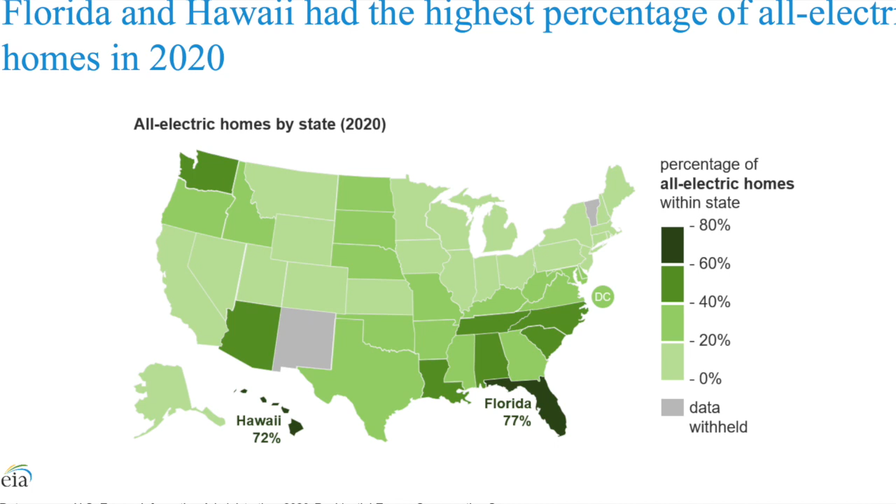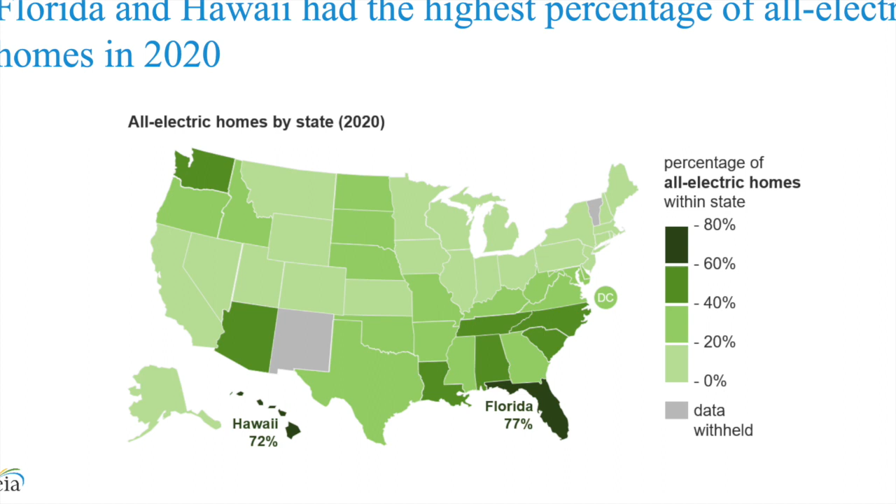One of the first trends we were discussing going into this conversation was grid interactive efficient buildings, or GEBs. Is that what we're seeing when we're looking at this graph? When you say all electric homes, are those the type of homes that are GEB?

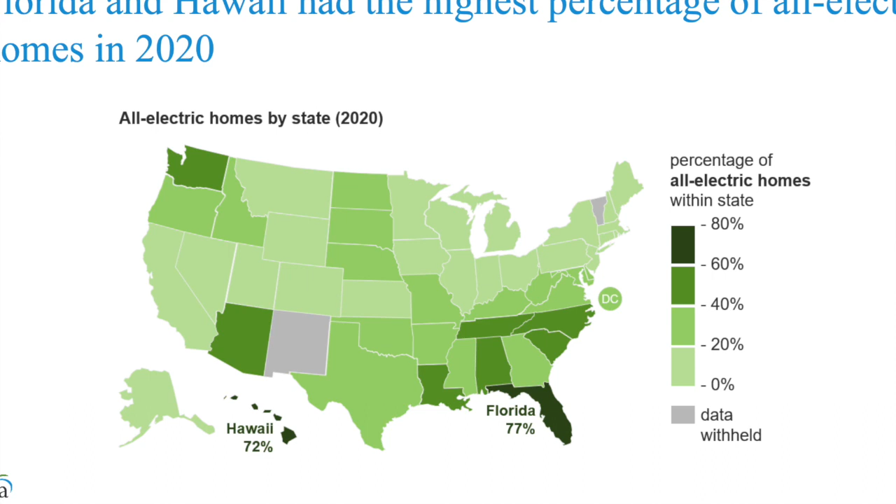Yeah, so GEBs are kind of going to go a step beyond this, but it is part of the same discussion. So yes, our first trend with grid interactive buildings is the next step. I think it's the next wave for electrification and how we look at our power grid.

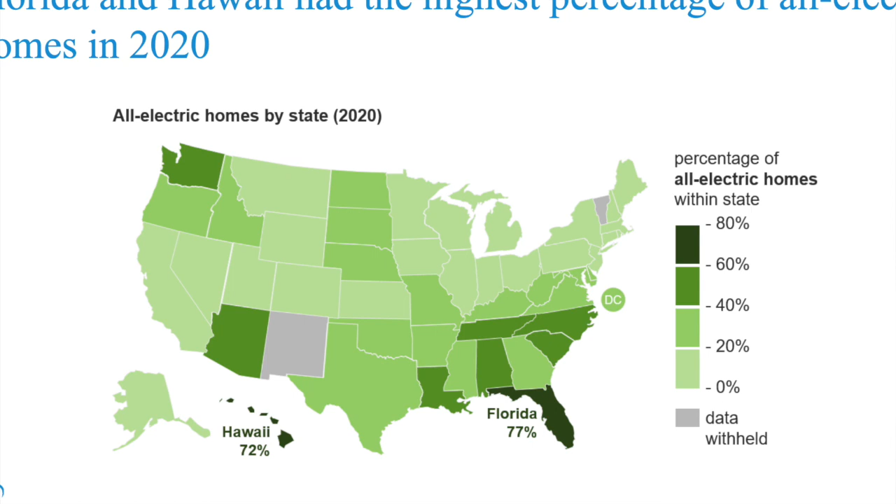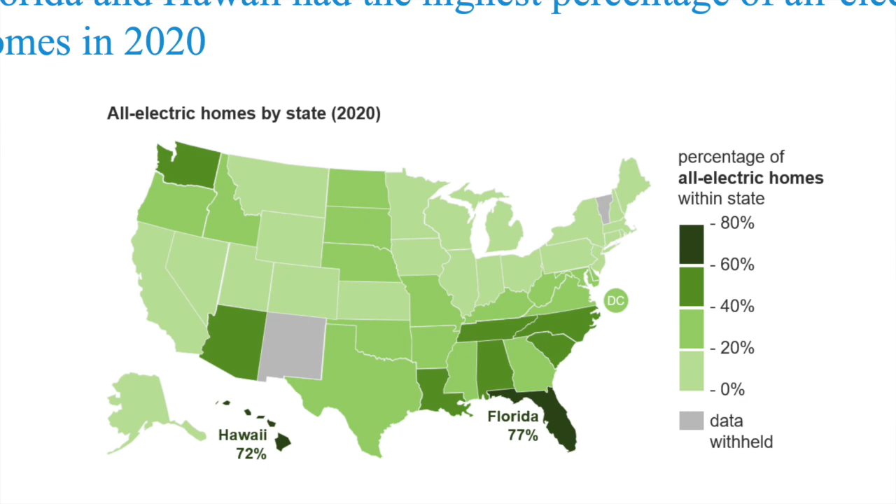So when we talk about grid interactive buildings, we're talking about building equipment and systems that work with the power grid. In other words, when you have a lot of clean power available on the grid, or low demand, or when the grid is really clean, there aren't a ton of dirty emissions being put out there because of the power grid. The idea of grid interactive buildings is that buildings work with the power grid, and draw power when it's more environmentally friendly to do so.

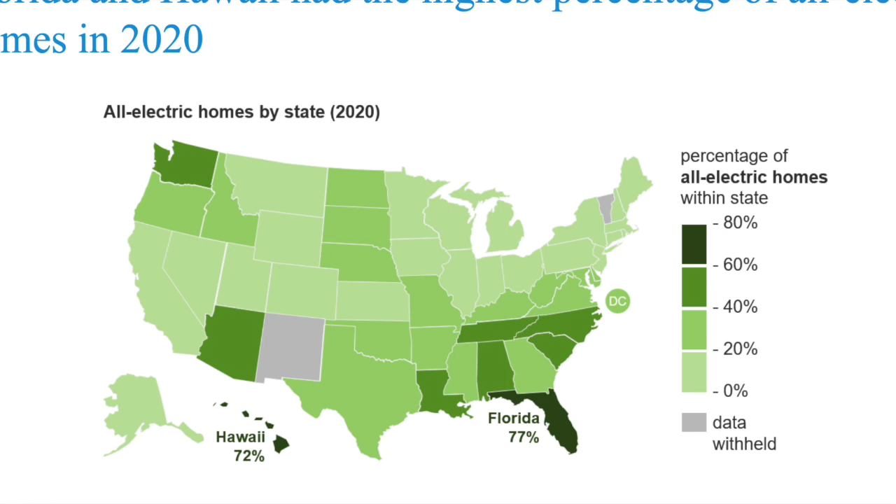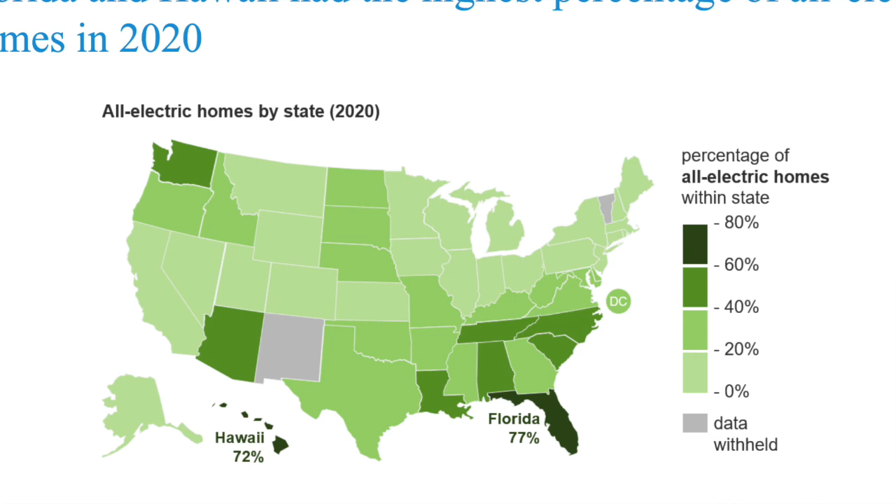So it's kind of like this time of use energy efficiency. You have a real-time carbon signal that is given out to the building. When you have high carbon intensity, lots of emissions on the grid, it's going to give a signal to your home saying, hey, this is not a good time to draw power, maybe shift your load somewhere else. So it's this really smart interactive way of using the grid to be more environmentally friendly.

And so that's going to be kind of the next wave. I did an article on this with GreenBiz for the Sonoma Clean Power headquarters. Check that out, it's a really good example of this grid interactive efficient buildings concept. There are homes in the US being tested out for this, kind of like a pilot to see how they're doing. It's been done on the commercial scale, and now they're looking at homes and how they interact with the grid.

So what's the legacy solution? If this is the next wave, what's been typical beforehand? So we haven't really been looking at how the grid performs. We've just kind of been looking at our own independent energy performance for buildings, but there hasn't been any concern really with how our building, our neighbor next door, and our entire community, how does that grid perform?

But now it's like you have this microgrid for your home and its connection to the power grid and how it contributes and plays a role. So if you shift your building loads and use less energy at a time where it's just better for the grid, or more environmentally friendly, you're contributing to the community's emissions as a whole. These small microgrids contribute to the larger scale power grid, it's a super interesting concept.

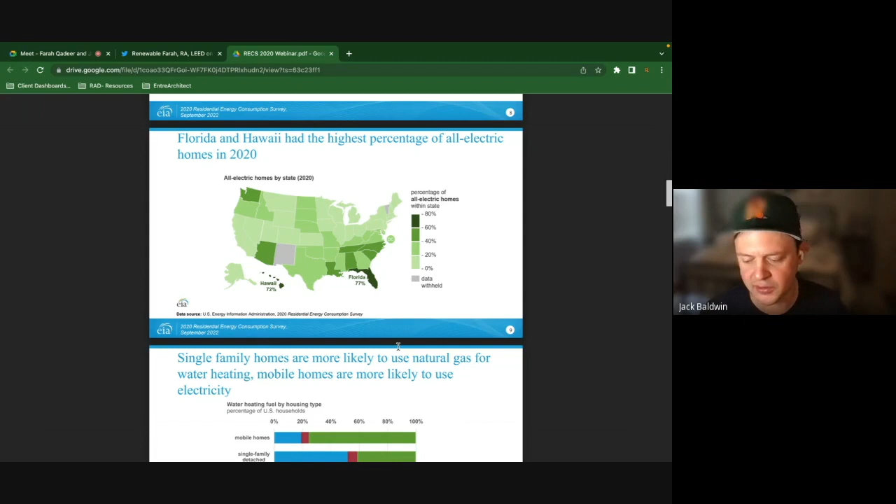So just being prepared is a great way to go about this. Exactly, yeah. And I want to speak a bit more on some of the statistics on these slides, which I think are really going to hit home the points you're making right now.

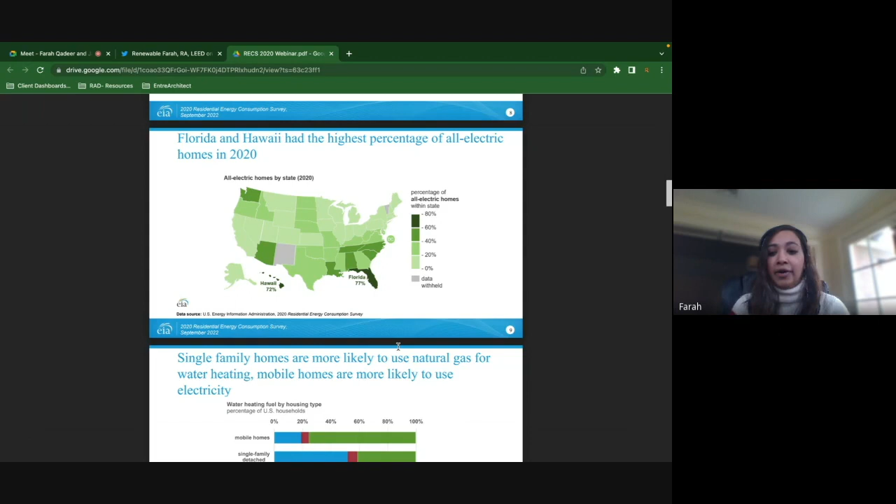So if we scroll down to this next slide here, it's just a general trend we're seeing as far as energy use, consumption, where energy portfolio lies, what our fuel sources are. We see single family homes are more likely to use natural gas for water heating. Mobile homes are more likely to use electricity. So although it's not necessarily in our countdown here, that use of mobile, modular, or shipping containers—these sorts of things I think are going to be cropping up more and more.

I haven't seen this as much on the East Coast or up here in the Northeast. I've been hearing about mobile homes a lot more in the Midwest and West Coast as well. But again, when we look at this particular survey, it kind of gives us a trend of mobile homes going more towards electric. Just something to think about.

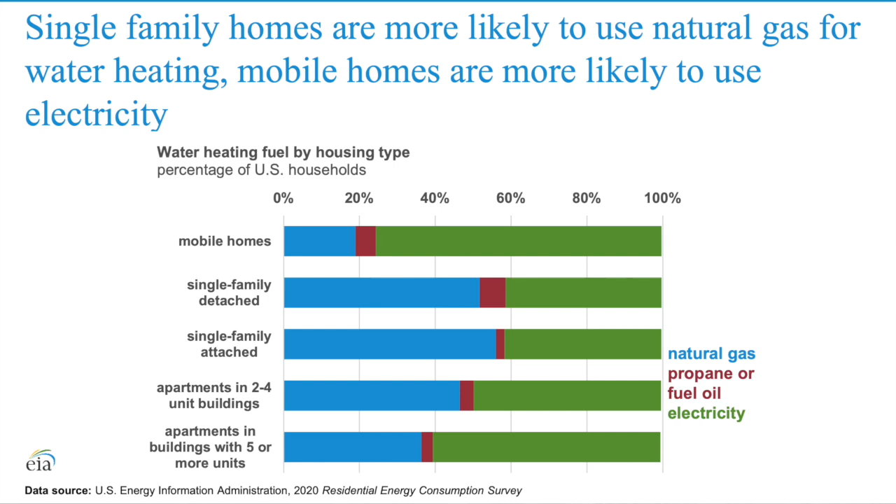Well, and that ties into our next topic, which was electrification—by that we mean getting rid of fossil fuels burning in the home, so gas being burnt for a heat source. What are some things being done to promote electrification?

So this is impacting all sorts of building systems and equipment—everything from heat pump hot water heaters for domestic water, to induction cooking. So this goes into electric appliances as well. Something I want to bring up, it's really new and controversial in New York—just recently, days ago, the New York State governor has been pushing a ban on gas stoves in new construction homes.

And that's really controversial because folks are saying, well, this is my home, how can you control that? Nobody likes to be banned from anything. That's true, but I will iterate that this is not going to impact existing homes that have gas stoves, but really just new construction.

There's a lot of conversation about how there are a lot of toxins being emitted from gas stoves. This is a huge issue where you have recirculating hoods. I don't really know the impact or the scale of how much these toxins are contributing to poor indoor air quality, but we know that indoor air quality issues are a huge contributor to health issues, and gas stoves certainly are a huge contributor to emissions.

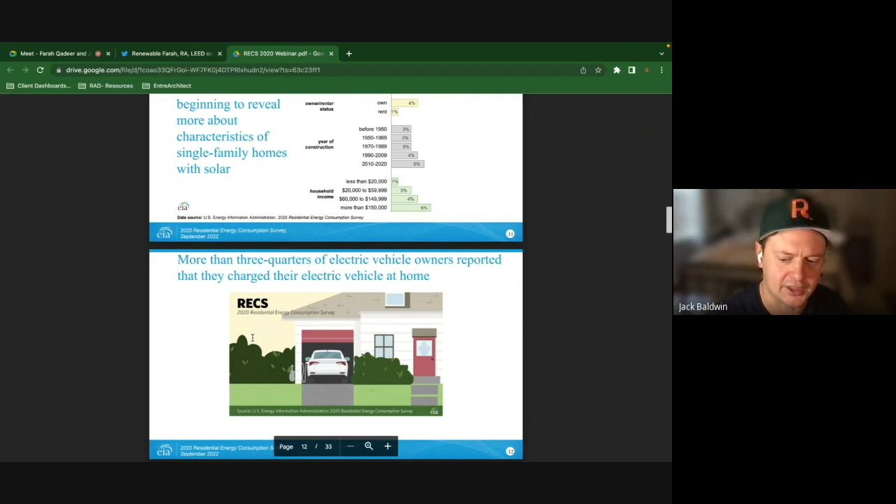Let's talk about minimalism too. I think that's a trend a lot of people discuss from a design perspective, but also from a size perspective. We hear the word 'tiny house' more than ever lately. So what kind of solution is that? All the trends we discussed previous to this all lead to this minimalist design.

Energy impacts and usage all come with the large scale and complexity of a bigger home. Because of these emissions contributions, I think we're going to see a lot more people looking towards minimalist living. I'm going to manifest it, that we'll see a lot more minimalist homes and people wanting to pursue that.

I think minimalist doesn't necessarily mean a tiny home. It doesn't mean having to sacrifice what you want in your residential space. But with the rising cost of real estate in the US, the emissions impacts we're seeing, and increased energy costs, smaller homes are just going to become more affordable options, especially among younger generations.

Maybe people in my age, in their 30s, are really seeking alternative ways to minimize their carbon footprint. It's certainly picking up in that generation. This conversation about tiny home construction and design, and even modular homes we spoke about before, will continue to crop up, and we'll see more communities focused on affordability developing around that theme.

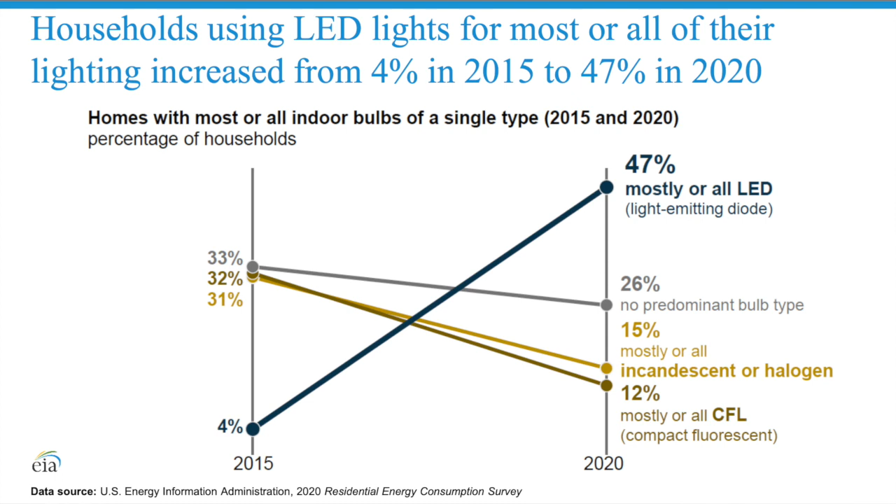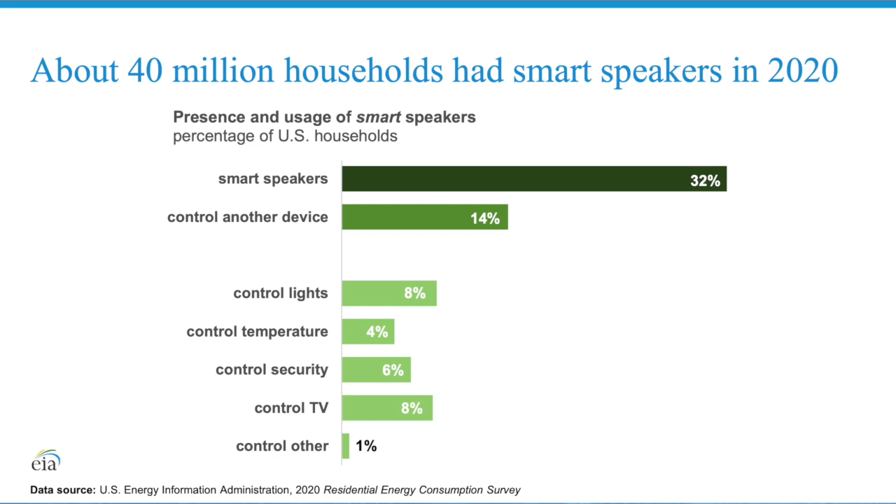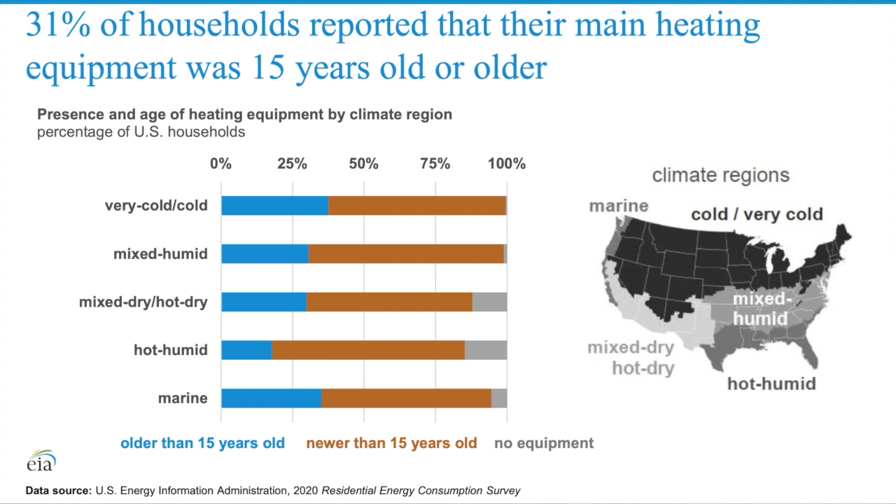31% of households reported that their main heating equipment was 15 years old or older. That's showing us that a lot of this equipment, which has a 20, 25, maybe 30-year equipment life cycle, is due for replacement. So the legislation we're seeing on phasing out fossil fuel burning equipment in homes and replacing them with something electric or more environmentally friendly makes sense. We have perfect timing for that. It's time to replace those and bring in the new cleaner stuff.

Well, I love that you're showing us statistics of things going in the right direction. It's encouraging, and also just simple things we can do - low shelf stuff you can get at Target, or ways to think, like we were talking about earlier from the design perspective, what kind of questions can I ask about materials and solutions that actually pay off big time. I'm glad to see we're trending in the right direction here.

Near 90% of households used air conditioning in 2020. So when I hear conversations about demanding too much electric, and going electric being too much power on the grid - well, we're already using so much electric, 90% air conditioning in 2020. If you replace that with a heat pump, a through-the-wall unit that's using that energy more efficiently, there's a lot to say about that. That already balances out your electric demand and portfolio. So I just want to plant that seed in people's minds.

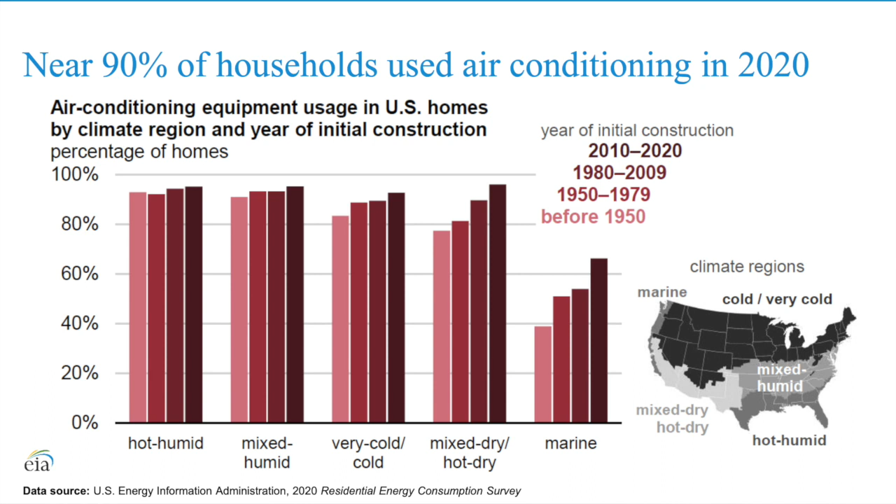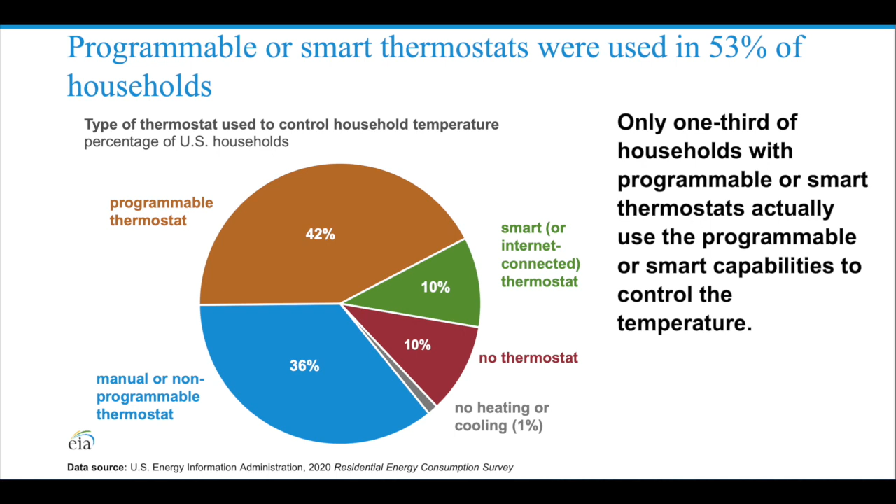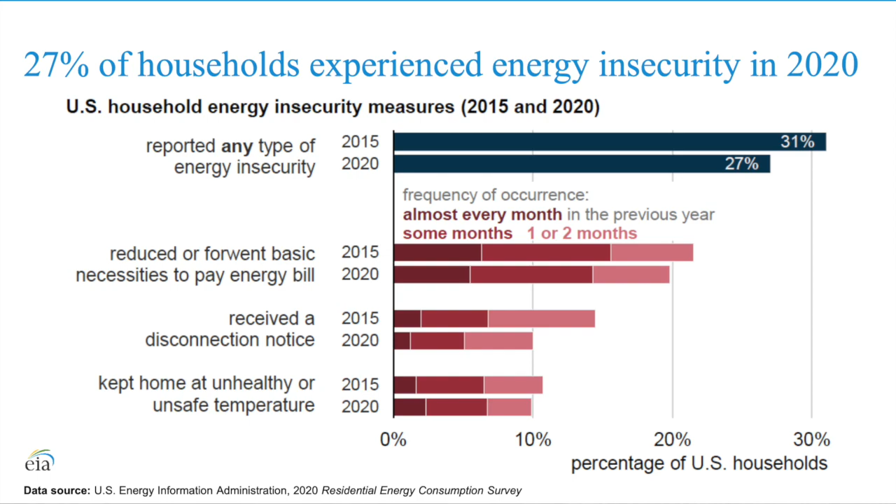27% of households experienced energy insecurity in 2020. What do we mean by energy insecurity? It's people who had an energy insecurity where they weren't able to use the energy they needed for their home for different reasons - whether it's an economic disparity where they weren't able to pay their energy bills, people who received a disconnection notice from utilities, or their homes were at an unhealthy or unsafe temperature. There's this imbalance where you're not properly using the energy you need for all sorts of reasons, social, economic, etc. It speaks to the need for proper energy solutions so that no one is left out - everyone has a solution and ready access to energy. As we continue to study electrification and renewable energy, there are more stable, optimal solutions available to the homeowner. I think that as utilities and building scientists continue to diversify our energy sources and provide more options for people, these solutions will start to develop for sure.